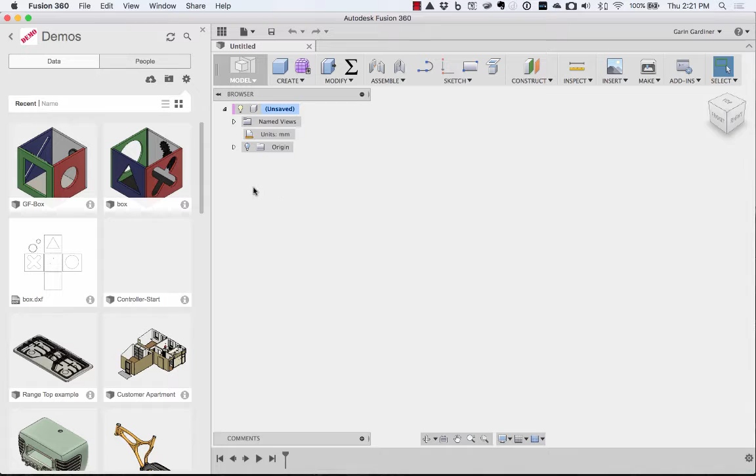So I'm going to show you how to create a new project, and also if any of you guys want to join this project, I'm going to call it a Glowforge project - a place where we can build things and share things out through the community. So I'm just going to call it Glowforge.

Create that, and then if anybody wants in, I can put a link up there. You can ask to join, and I'll just accept anybody that wants to join and see projects there. Part of this may be that I may want to add something like an icon and a few things, which I'll show you how we can do later. But I'm going to pin that to the top. So you can create a new project pretty easily.

I'm going to come into that project, and you can see that there's nothing in there yet. I could add people in here, which at some point you'll see people in there, but I'm going to close this for right now, and I'm going to create a new design.

Similar to what we saw in our GoToMeeting today, I'm going to start out with a sketch in the top view, and I'm going to turn on my origin so I can see that 0, 0, 0, which will be helpful as we move on in this design.

I'm also going to change from a 2-point rectangle to a center point. In my little sketch palette, you can change that on the fly, and we'll drag out the size of my rectangle.

I'm also going to come in and draw a couple of horizontal lines here and here. I'm not really too worried about where I place them, and then a couple of vertical lines there and there. I am trying to get them straight.

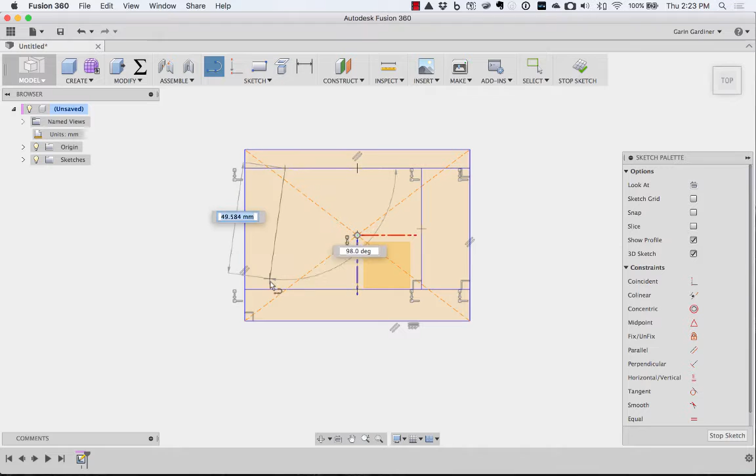You'll notice that it snaps them into place, but let's say by chance I accidentally put one in there that's not straight. You can either delete it and recreate it - that's a fast way to do it. You can also come over to your sketch palette and pick vertical horizontal and pick it, and it'll snap to vertical. And all of this, as I drag these things around, you can see how it all updates.

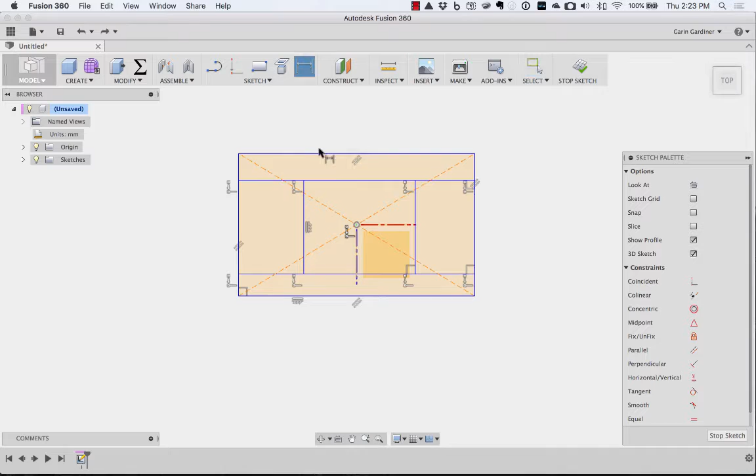But I'm going to come in with some dimensions and say, let's do the dimension of the total width of this. We'll do something like 100, and we'll do something like on the side, we could do something like 75.

Now what if we wanted to do some kind of equation there? So maybe we want this to be half of the 100 at all times. If I edit this dimension, you'll notice when I hover over the value, it tells me D1 is 100 millimeters. Well, I can use that D1 here. If I just type in lowercase d1, you'll notice that it makes it 100 millimeters, and it's always going to follow whatever I do to that D1 dimension.

If I go up to 75, they both go to 75. I can also do things like D1 divided by 2, so it's always going to be half of the 75. I could say D1 divided by 2 plus 25. So you have a lot of capabilities that you can come in and do. But in this case, I'm just going to say D1, so it's equal.

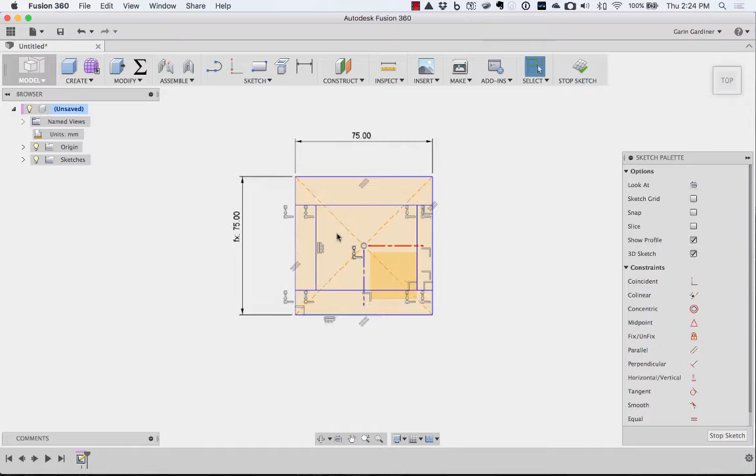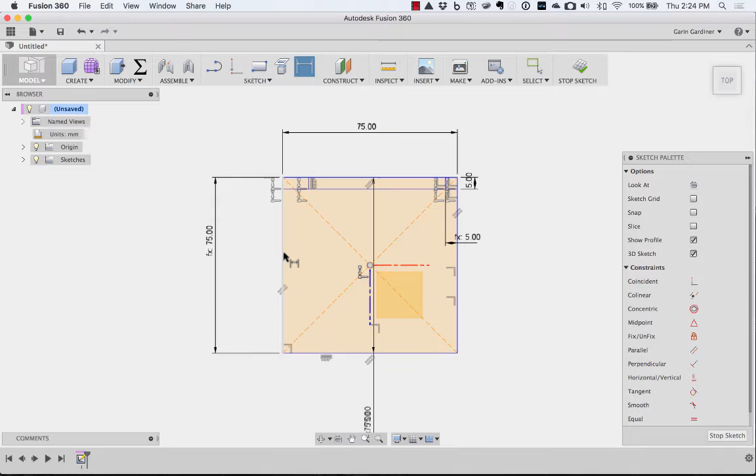We're also going to come in and add some dimensions here. We'll say that that's something like 5 millimeters. And similar to what we did today in our little webinar, if I double click here, same thing, D3. Now I can say the dimension here and here is going to be D3, and the dimension here and here is D3. I can also see when I do that, there's a little FX, although I don't think I hit the right thing there. D3 - there we go.

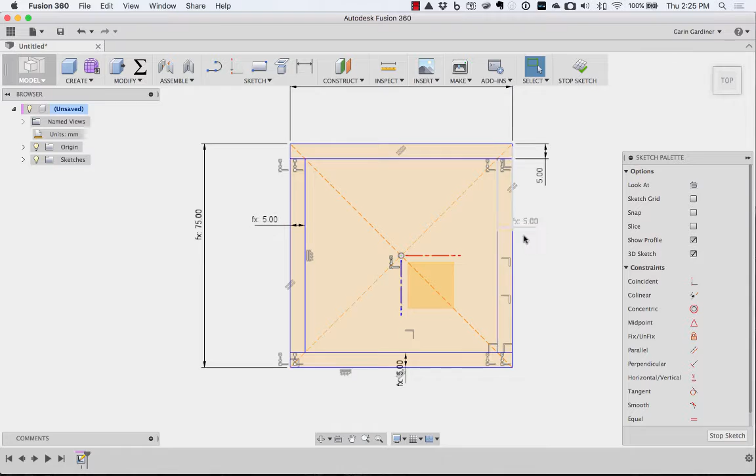There's a little FX next to the icons that are driven dimensions. Those are dimensions that are using some other dimension. So here I can see this doesn't have an FX, it's just the value, and then I can see these have an FX. So I know if I change that to be 10, all those others are going to change. If I go to 8 or 5 again, they all update. So that's in the sketching - that's a really easy way to lay that out.

And from here, I'm just going to save this, and for the first time we created, the name of this, we'll do 'box'.

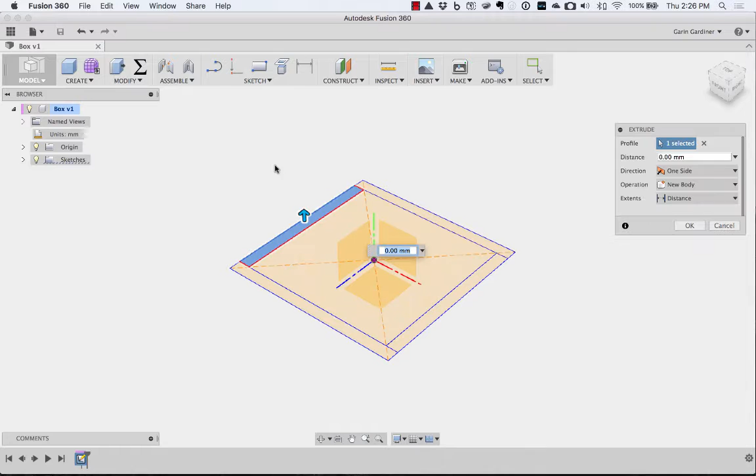And we'll save it. From here, we're going to extrude one of these up. You can either come down to under Create, you can come to Extrude. Press pull is kind of a universal command that does a lot of different things, so oftentimes you may want to start there. If I use press pull and pick the area I want to extrude, you'll notice it goes to an extrude command. If I pick an edge, it's actually going to fillet that edge.

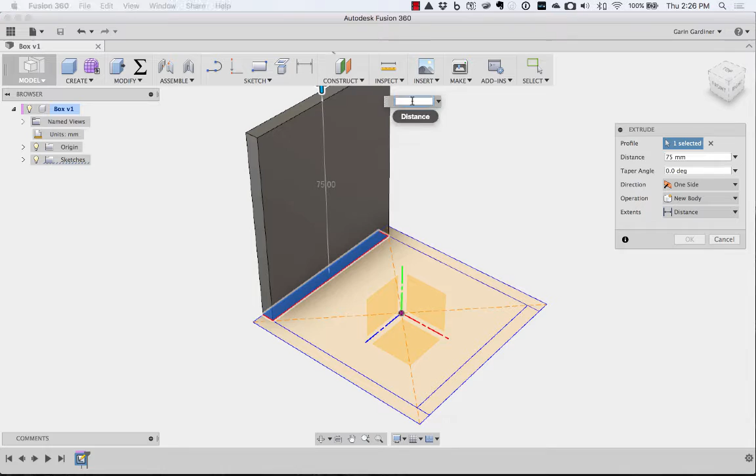So it does many different things instead of having to pick a number of different commands. But let's extrude that up at something like 75 millimeters. That might be a little tall. Maybe we'll go 50. Something like that. Let's see. There we go. We'll say 50.

The sketch gets turned off, so I'm going to expand the sketches and turn that one off. And I may even rename this and say something like base sketch. You can name pretty much anything in there. You can see my timeline as I'm creating this.

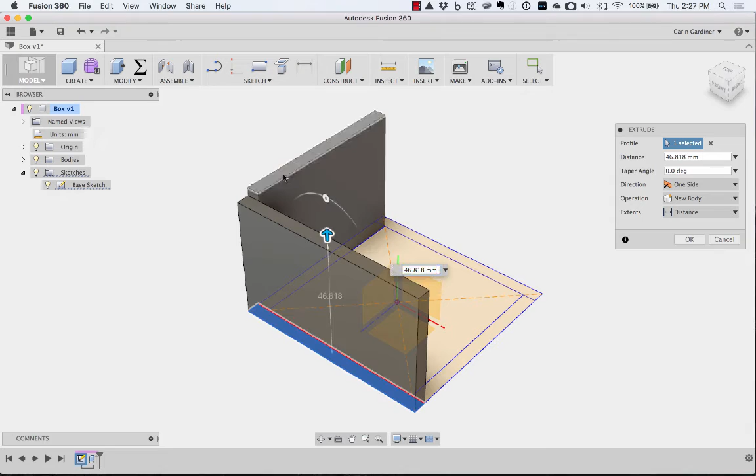When I go to extrude the second one, I could just pick the top face and it's joining these together as one component or one body. In this case, I probably want multiple bodies, but I also don't know exactly how. I want to set this up where if I change one value, all sides update.

So before I extrude that up, I'm going to go to my parameters, and you can get that from here. Change parameters, and underneath that extrude, we can see here that D7 is 50 millimeters. Well, I could keep it D7, but I want it to be something more recognizable, like height. And I might even make that a favorite where it shows up at the top all the time.

And I could probably do that with that first sketch with this 5 millimeter value that is the thickness of my material. Maybe I'll do thickness. So those are two parameters I'm probably going to use a fair amount: the overall height of this box and the thickness of material that I use.

So now I can come back and say, let's grab that, drag it up, and here I'll say height and make sure that I make a new body out of it. So now those two share that height parameter.

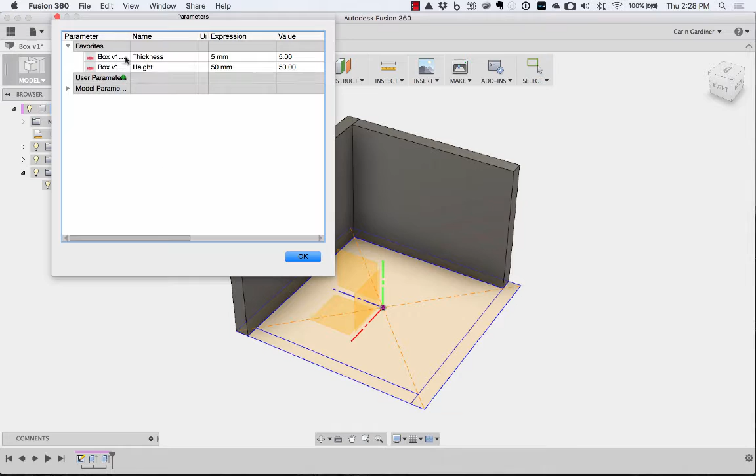So if I come in and say let's make the height 75, they both update. If I say let's change the thickness of this to be 10 millimeters, it updates. We'll say 5. Let's go back in there, say 5 there, and maybe we'll do 65 here. So it looks pretty good.

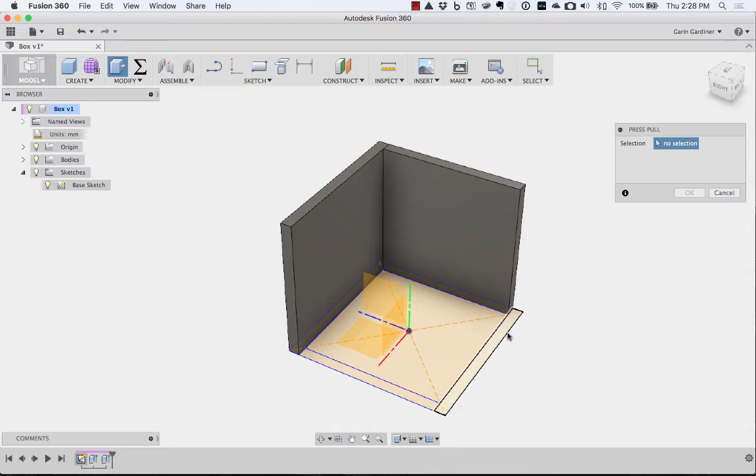We'll finalize this by grabbing that, dragging it up as a body, and the distance is going to be height. And I'm going to right click, repeat press pull, drag up, new body with the height. And I'll right click, repeat press pull on that, pull that up, new body, and then this one is the thickness, which I don't have in here yet, so we'll just say thick.

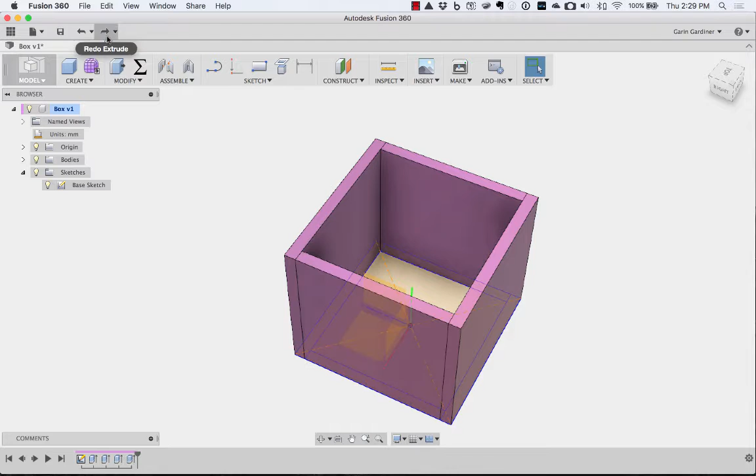Whoop, did not mean to do that. Let's change that back to, there we go. Alright, let's pull that up and we'll say thickness with a new body. So I have 5 new bodies.

If I look over in the bodies directory, I have the 5 of them, and I can even come in and say that is the left. Now we'll say that's the front, back. You don't have to do this, but it makes it kind of nice when you're working on it to be able to make edits and see all of those.

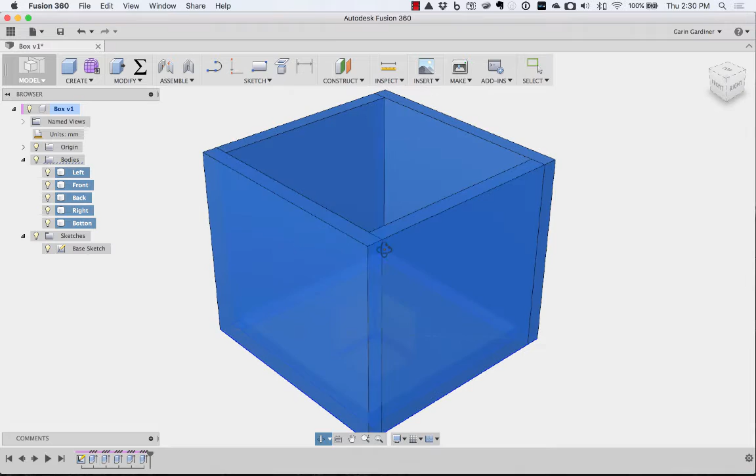And I may also want to convert these at some point to components. So those are all bodies, and usually when I'm laying something out I may use bodies, and then at some point I may say let's make components out of all of those. I probably should have waited to name those after I made components, because it doesn't maintain that. But here these are their own individual components that I can kind of dissect, pull apart, and snap back together. But components react a little different than bodies, and that's probably a bit separate conversation, kind of exactly components and bodies.

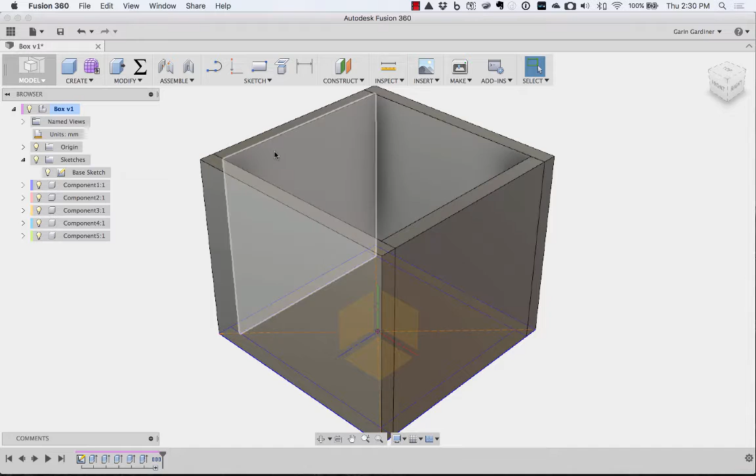But you can create something that's a body, and it's kind of flexible for conceptual design and laying things out. Then you can make components and figure out that these two components go in as a subassembly, and I can turn those off together. These two go together, and I can group and turn those on and off. So there are things you can do like that.

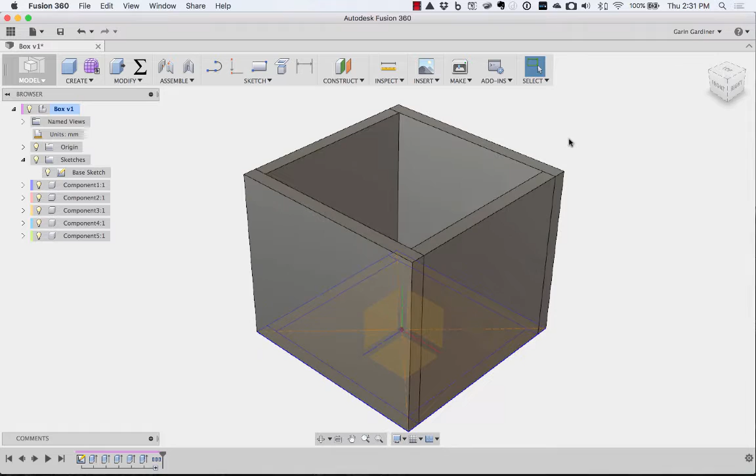But at any rate, let's bring those back together. We may also want to come in and apply some material. So the physical material of this, we may say that the physical material is something like walnut. I'll drag it to the top level and apply it everywhere. Then it may be that I want a different visual appearance.

It may be that you want to paint them white, but you want a physical property of oak. If I right click and go to properties, it tells me the physical material is walnut, and it has the area mass density of that component with that material. So if I change it to aluminum, it's going to have different properties.

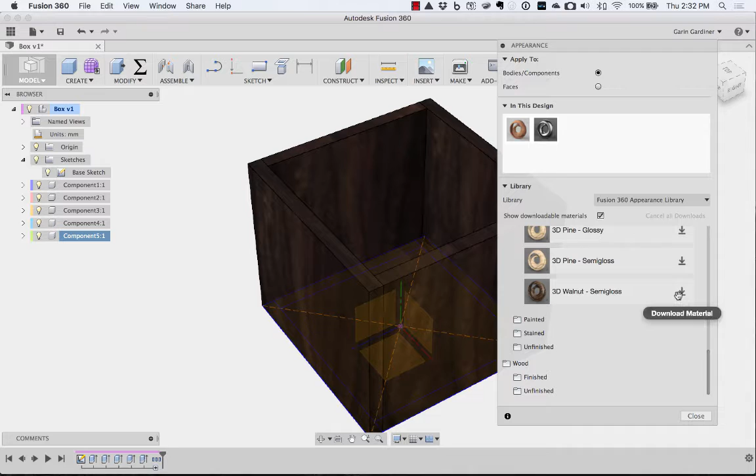That's a good way, if you're worried about weight or other information, to get it there. I'm going to go to appearance though, and we have some new solid wood options that I think look a little nicer. So I can download the semi-gloss walnut and drag it onto a face, and we can see that. Let's just apply it on all faces. You can see the end material and the side material.

This is kind of cool. If you go to one of those, like the base, let's say you don't want it to show the end grain and want it to look a little different, you can come in and adjust that.

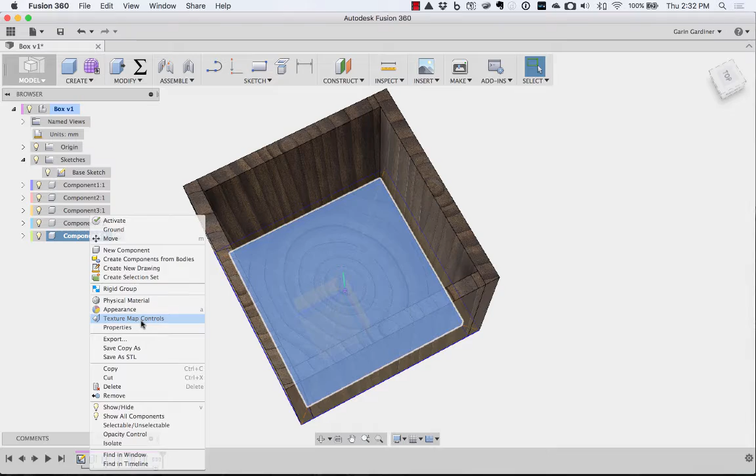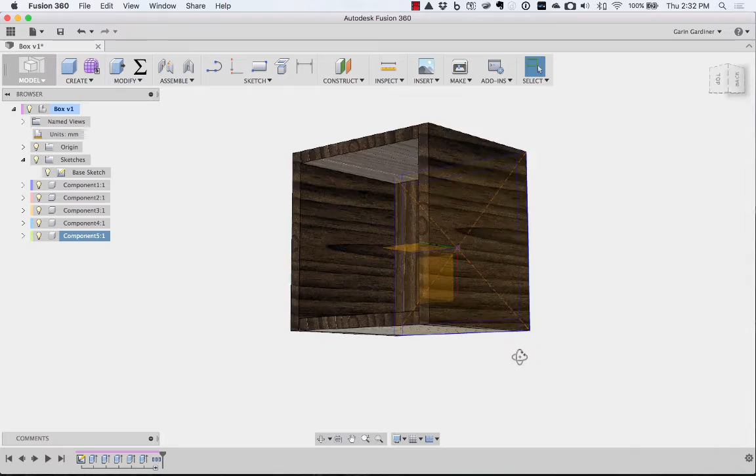Let's go to texture map control, and let's see if I can get a good angle here so you can see this. I can actually rotate that wood grain so it goes the long direction instead of the top direction. It's kind of cool that you can really adjust that how you want. If you're looking at rendering this to make it look nice, you have a lot of control.

Okay, so once we have that, I'm going to save this. We'll say that we have the walls, and from here we have that. It's easy for us to come in and say let's change that to be 5 millimeters. Everything gets thicker. Let's say it's 50 millimeters tall.

So you can see how flexible it is once you've created the layout that you want, how easy it is to come in and modify those things. So if you spend a little bit of time up front, it makes it a lot easier downstream making modifications if it's something you're going to use a bit.

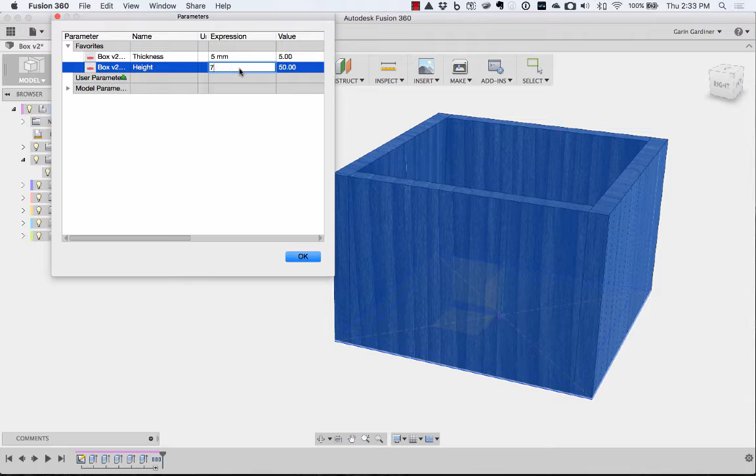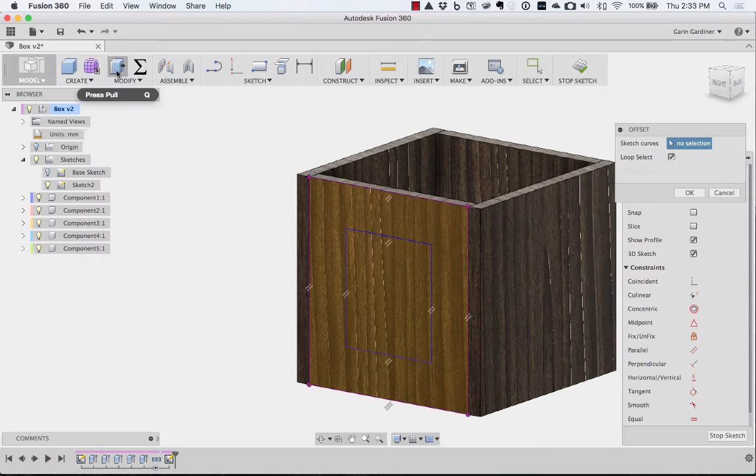Let's go to 70. Okay, so now with that in place, I'm going to turn that base sketch off and the origin, and I'm going to cut a couple of things on each of the faces. So we'll go to the right face, and let's say we just want to offset the edges and cut a rectangle through there that's offset. Let's just cut that through. You can see that we now have a hole that goes through there.

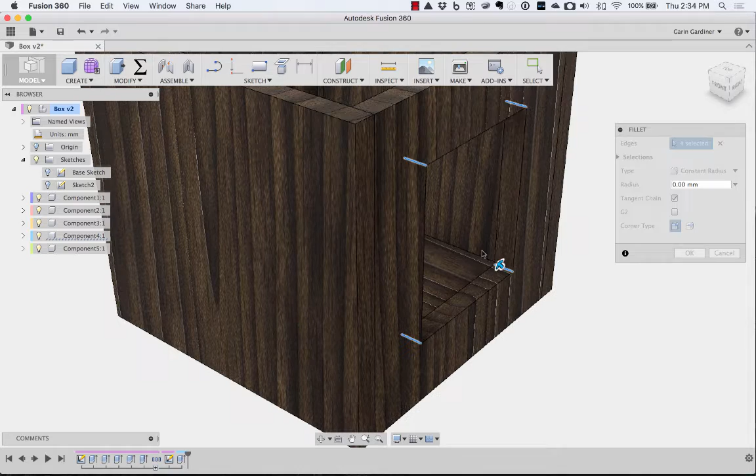If I wanted to put a nice little fillet on the edges, I could use press pull, grab the edges there. You may wonder how I'm orbiting around. If I hold the shift key and the middle mouse key down, and pan around, you'll notice that it allows you to orbit in 3D space pretty nicely.

If you don't hold the shift key, just hold your middle mouse, you can pan. If you roll your middle mouse wheel, you can zoom in and out, so it makes it pretty easy. But you can see here that we can fillet that edge a bit. Probably not something you'd use on the laser cutter, but if I wanted to put a chamfer around that edge, you could chamfer it as well, and you can see that material is just awesome. You can chamfer that and get a nice chamfer on the edge.

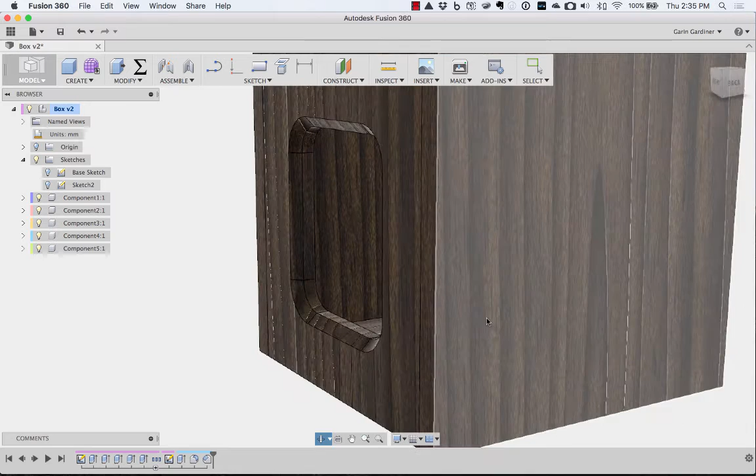I'm going to delete that chamfer, so I can just right click on it in the timeline and delete it. Let's go to the front view of this.

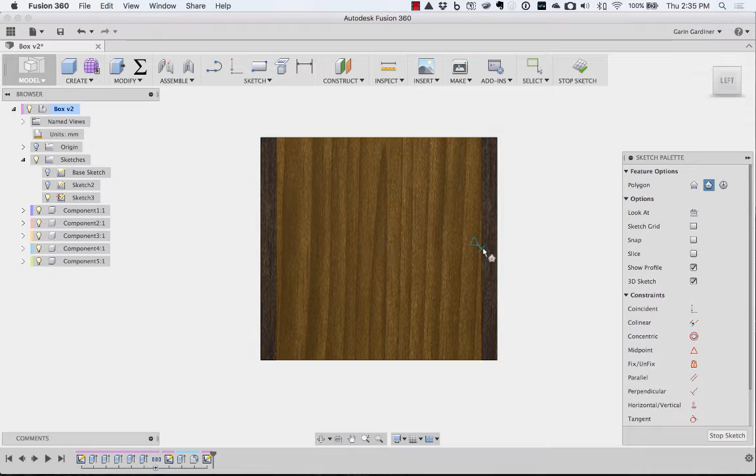Actually, not the front, let's go to the left view, and we're going to place a sketch here. This time we may want to use a polygon, and we'll find the midpoint there and come over, doing 3 sides.

Let's go here to number of sides, we'll do 3, so it's a triangle. Drag it down a little bit. So now I have a triangle there. I want this bottom edge to be horizontal, parallel with the ground.

So I'm just going to say that we're going to make it horizontal. Now I can drag that around a little bit. If I wanted to change the size of this, I can put a dimension from this base edge to the top and

say maybe we want it to be 50 millimeters. It's going to grow for me. It may also be that I want to find the center of this box.

So we'll come down here, and we may have - that may be the center - but we'll draw a line there, and then, no, I think that's the center.

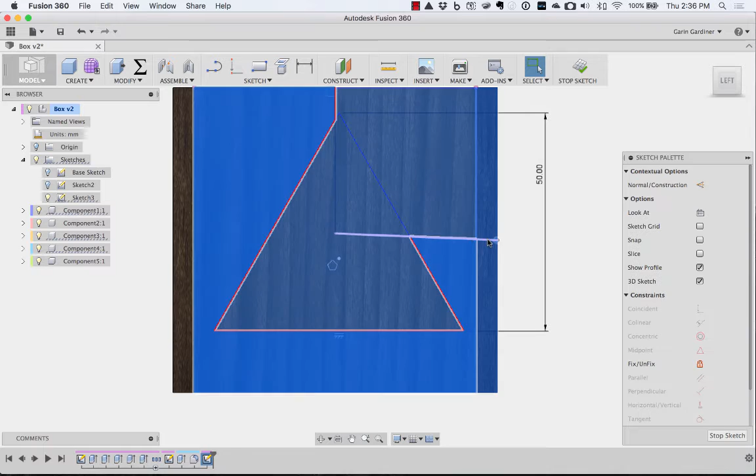Let's do that one more time. We'll find - oh, I think it is in the midpoint there. So let's drag that over.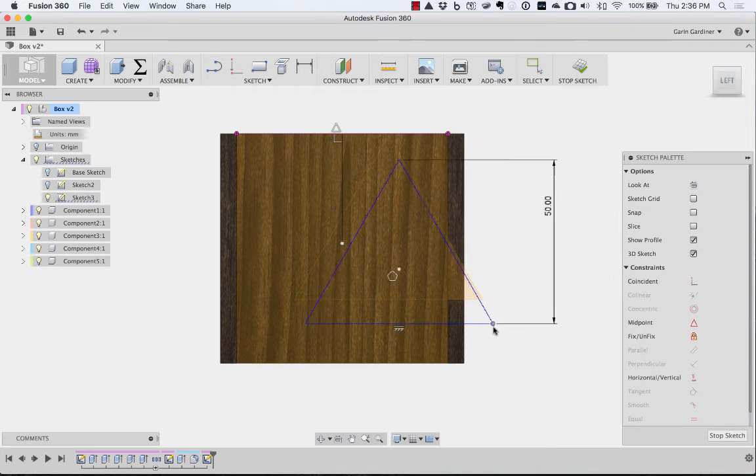Let me undo that so we can see. When I place this, let's grab one of the edges. You can see that I can move it around. Well, let's pull it down here just for a minute.

And when I draw these lines - we'll make this a construction line in a second - but I can find the midpoint of this line here, kind of track over. So that is the dead center of this box, and there are a couple ways of getting that, but that's the dead center.

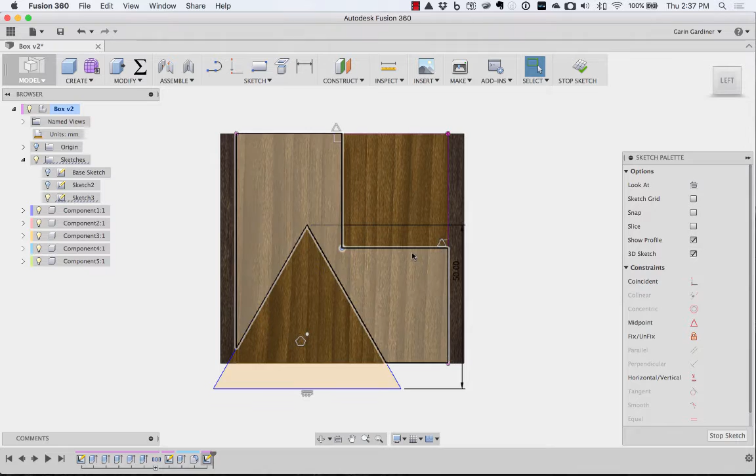I'm just going to turn those into construction lines so they don't show up if I try to extrude this. And then from here I can also grab that point and that point, snap them together, and we can see where that is.

Now it may not be, looking at this, quite where I want it to be. So instead we may say let's put this on the edge and not the point, so now I can move this up or down kind of where I want.

So it's centered side to side, but up and down I can kind of eyeball it or put a dimension off of the bottom down here to place it where I want. Maybe we do 10 millimeters.

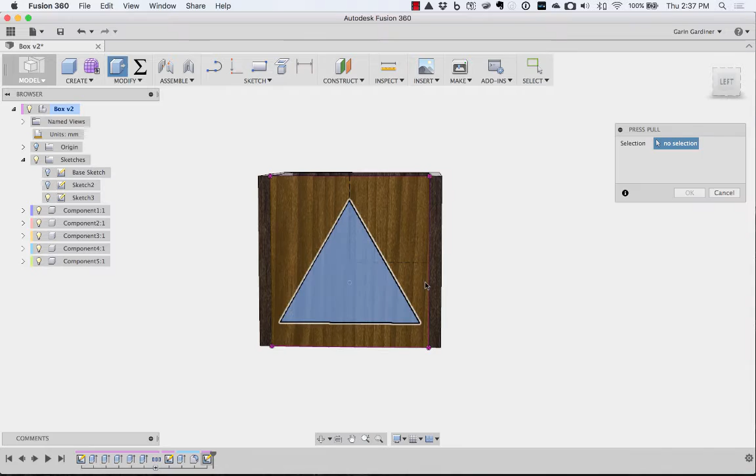So once I have that, then we can come in and say let's just extrude that through my part. Let's make sure I grab the right thing. There we go, pull that through. So now we've cut that.

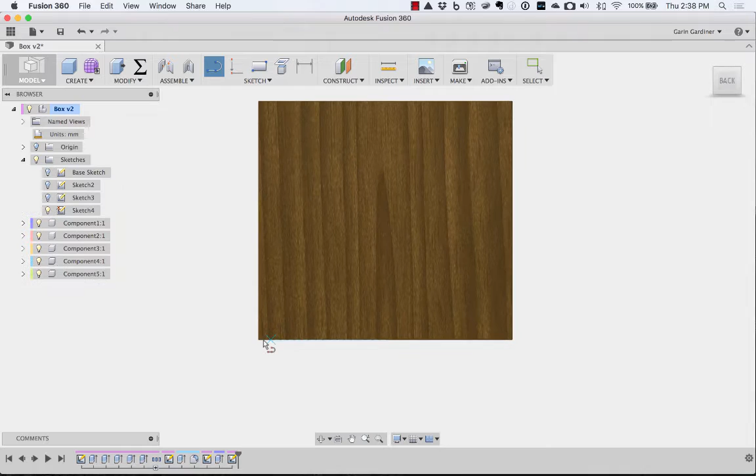And then the final one, let's go to the back. I'm going to create a sketch that's going to go from one corner to the other corner, and for fun we're just going to use a slot.

We'll just do something like from there to there, and we may want to place a specific dimension here so we know it's the same on both sides. So I'm going to pick center and center, and you'll notice when I do that - let's just pick center, center - and it's allowing me to place a dimension here.

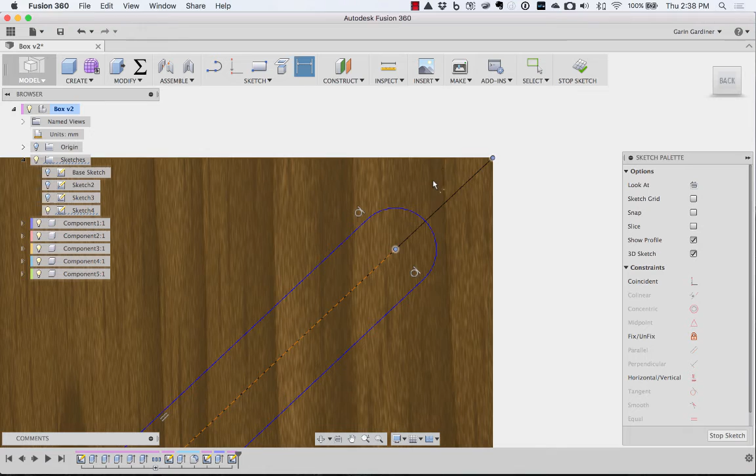So when I'm placing this, if I come close to that edge and pick, it's allowing me to pull in an aligned dimension. I can also right click and say align vertical or horizontal. So if I do horizontal, you can see that it's locking horizontal, vertical, or aligned to the 2 points that I've picked, which is kind of handy.

And we'll do something like 15 millimeters there, and we'll do the same thing here. We'll say aligned, going from point to point.

Looks like I'm not, there we go. Make sure everything's deselected and make sure I'm just getting those points. Right click, aligned, and we'll say 15.

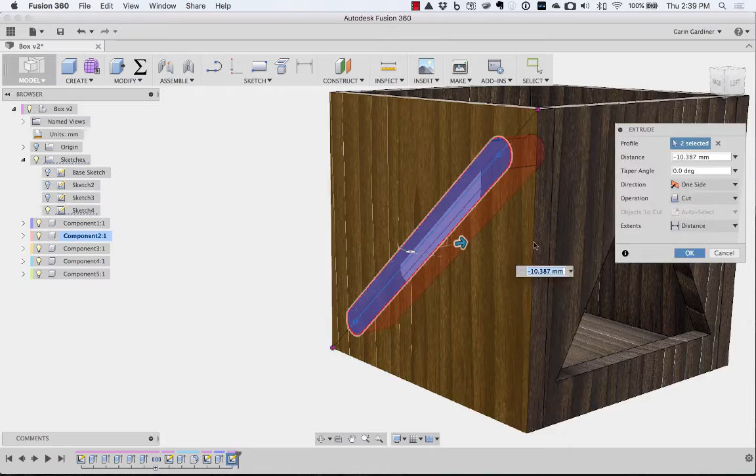Alright, so with that we can grab each of those sides, cut them in. So I have a slot. What if I want that to be an X?

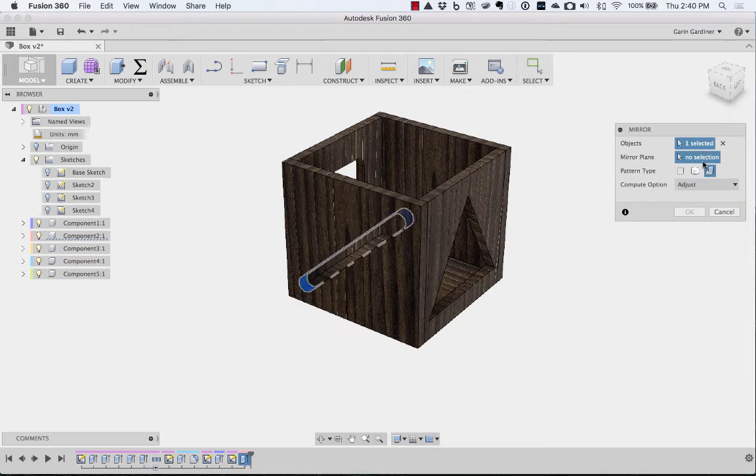I could come in with my mirror command and say we want to use, I can pattern faces, bodies, or features, and I'm going to do a feature, and we're going to grab that feature from the browser. And then for the selection, I'm going to use the mid plane here, the origin. I can grab that plane, since if you created the sketch right in the dead center, it's easy to grab that plane. So that works.

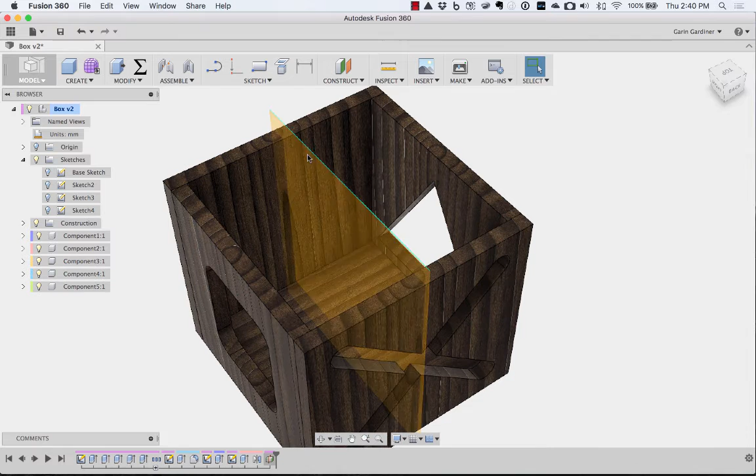Now in case you didn't do that, one thing you could do is grab this mid-plane option, so under construction mid-plane, and you could pick plane or face 1, face 2, and it gives you a plane right in the center of those two, and regardless how big of offset you get, that plane will always be in the middle.

But if we've constructed this correctly, I should be able to come in now and try things out and say, well, let's make this 8 millimeters wide, and we'll say 100 millimeters tall. And we can see it compute all of that. So all the parameters and everything I've put in there.

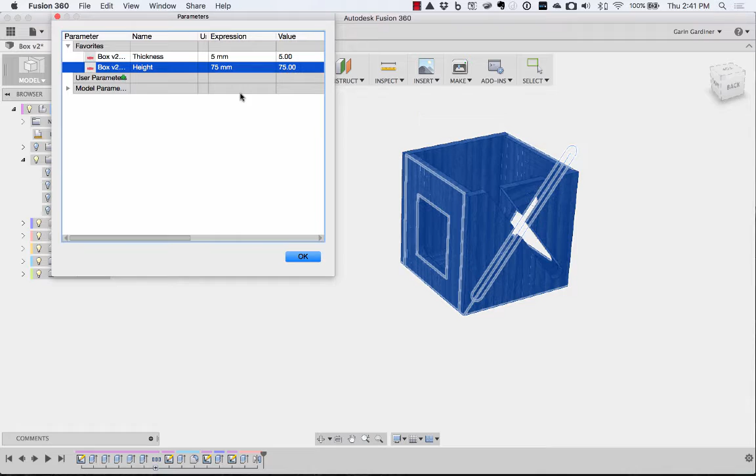Now there may be some things that I'd want to adjust. I don't have all of these things parametrically tied in so that everything updates 100%. So it just depends on what you're trying to do. You may want to come in and add a little bit more intelligence so that it's exactly where you want, or centered, or any of that good stuff.

So with that, let's take a look at that sketch there. It looks like that didn't stay horizontal. That's kind of interesting.

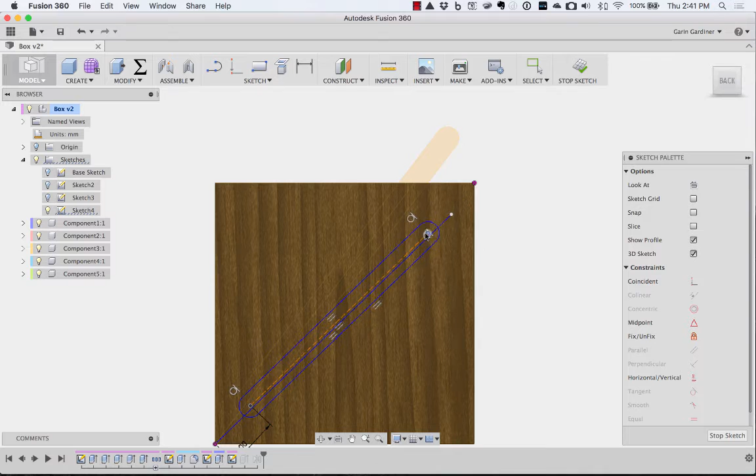So let's do this. And when you run into things like this, it's easy to fix. In this case, we'll delete that, and I'm just going to pull that down and redrag that over. So there are some things you can do if you run into these things that aren't updating like you would expect.

And sometimes if it's acting funny, you can, like in that case, we'll get rid of that line, and I'll just draw another line in there. So we'll go point to point and drag that there.

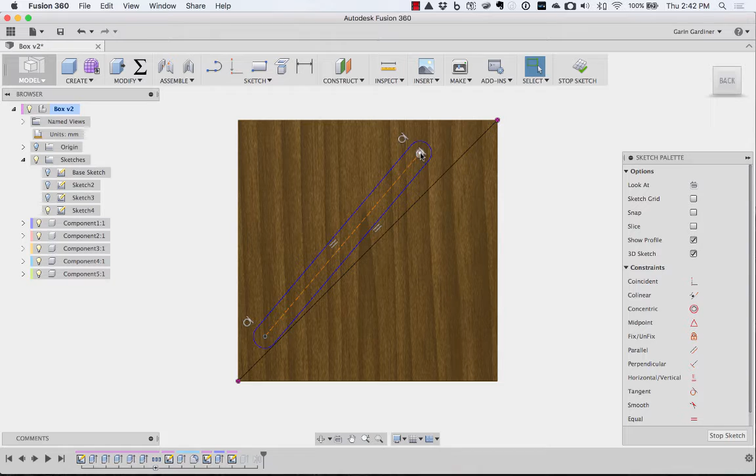And you can see here too, it looks like I don't have a tangency. I don't think I put a last tangency on that last edge. So we'll say pick both of those edges. It gives me a nice tangency on that sketch, and you kind of get how you can do that. And I could place all the dimensions in there, but in this case I think we're in good shape.

So the final thing I'm going to do is let's add a couple of gears on here, and maybe let's save this, and then I might add some different materials on here real quick.

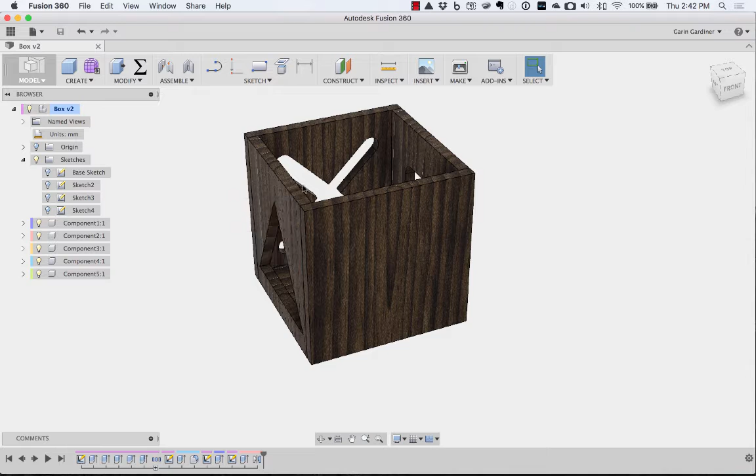So let's just go to the appearance, and we may want this to be more of like a kid's toy. So I'm going to go to plastic and say, red, green, yellow, and maybe we'll make the bottom just a black, or maybe we'll even do transparent on the bottom.

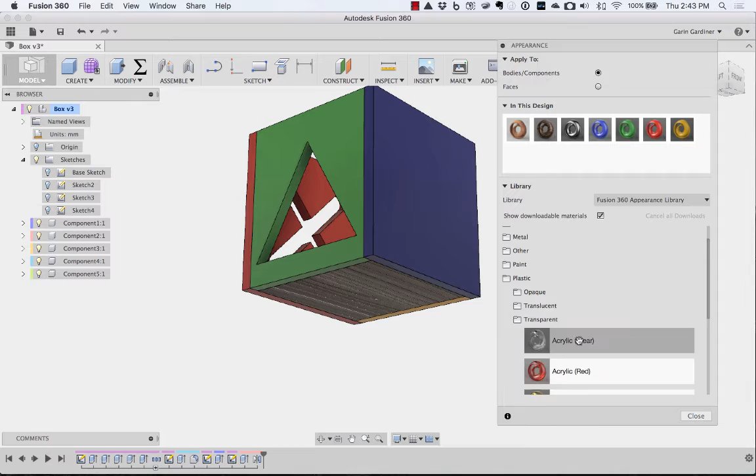We'll say plastic transparent and place that on there. So we get something like that, and let's save that.

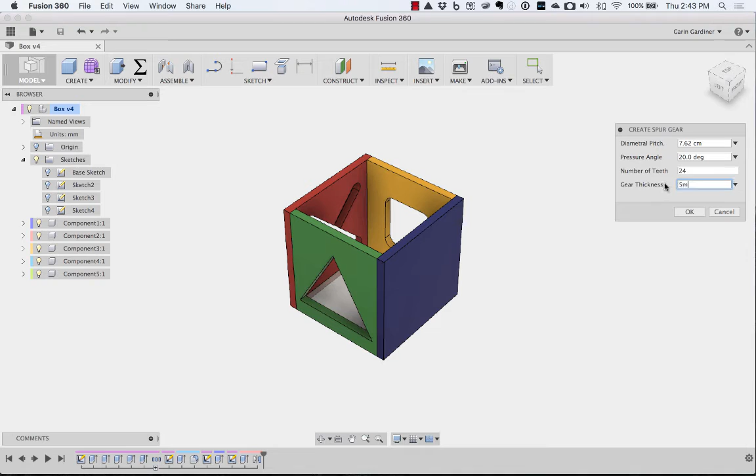Now here I'm going to go to one of my add-ins that I really like. It's just a little gear generator, and I'm going to tell it that we want 24 teeth at 5mm thickness. Hit OK. So that created one gear for me.

We can see what that looks like. And then let's create another spur gear. Let's go to script, spur gear, and this one we're going to do 8 at 5mm.

So we have two gears, and I'm just going to look from the side here. Let's just grab both of those and pull. There we go. Make sure we don't get the yellow part. I'm going to pull them over kind of where I think would be a good spot. Make sure we get them both.

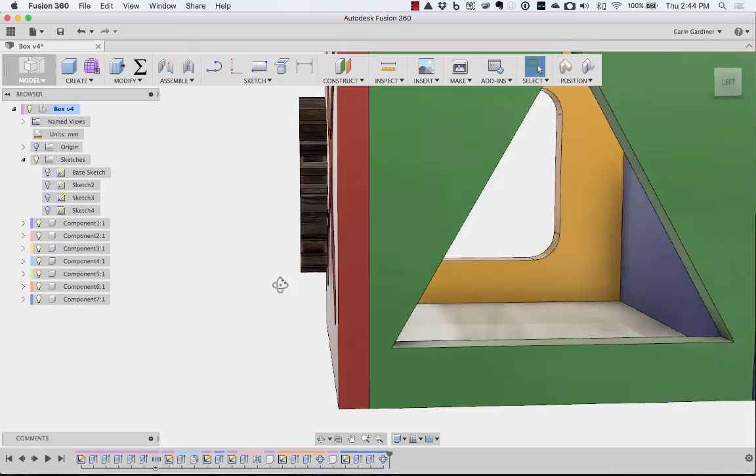Kind of a good spot, and then we'll go to, although I want those to be on the back face, so let's pull those over to the other face. And I'm eyeballing this right now.

Let's just say that it's a little toy. I'm not too worried about the exact location of the gears, but I do want them to mesh. So we'll do something like that.

That should work okay. If I'm doing these with metal or something that's more of a precise thing, then I adjust them a bit more appropriately, get the engineer's handbook and figure out what the center distances needed to be with the gears that I've specified, or hand calc it.

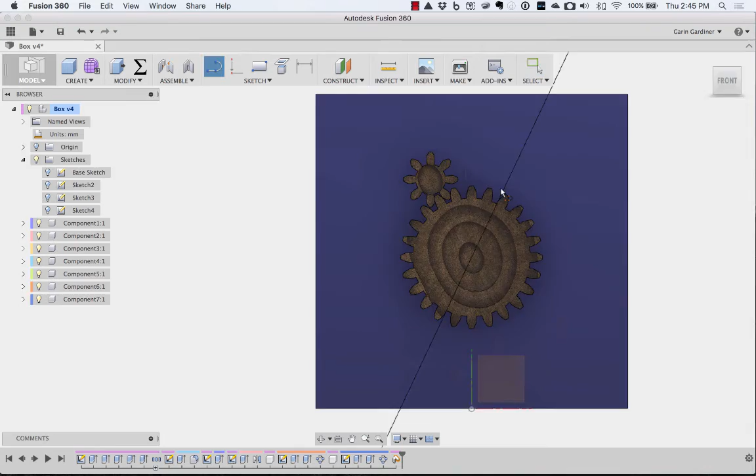In this case, we're just going to drag them. Let's take a snapshot to keep the location of them, and then I'll create a sketch there. I'm going to use the project command and project that face and that face, and then turn off those gears. So now I have the location of them, and I can use that for my hole.

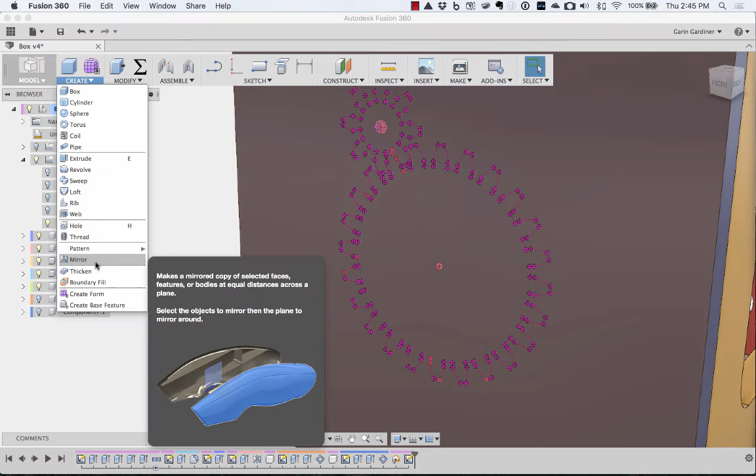I've kind of eyeballed where I want it. Now I'm just going to zoom in there to make sure I get the right point. Let's grab that point right there and go depth. We can use thickness here. We want to go through the entire part, and 3mm is okay for the diameter.

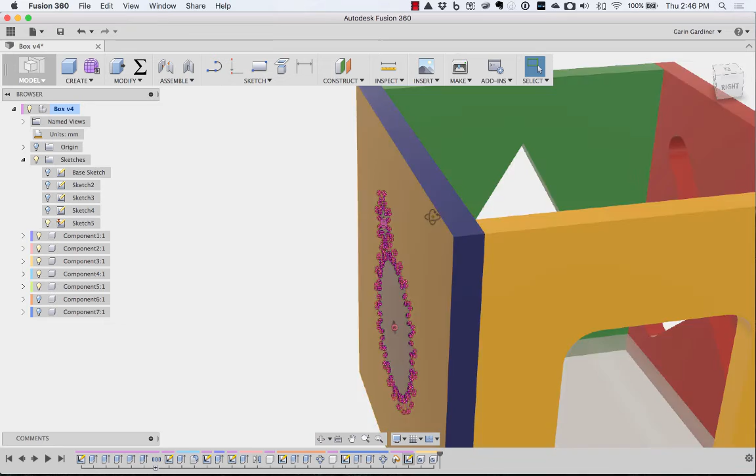Let's turn that sketch back on and zoom in here. We're going to repeat that hole and place it there. 3 millimeters, we'll say thickness. That way, if the thickness of my plate material changes, that hole will always go through it as well. Okay, so we have those, and now I can grab my joint command.

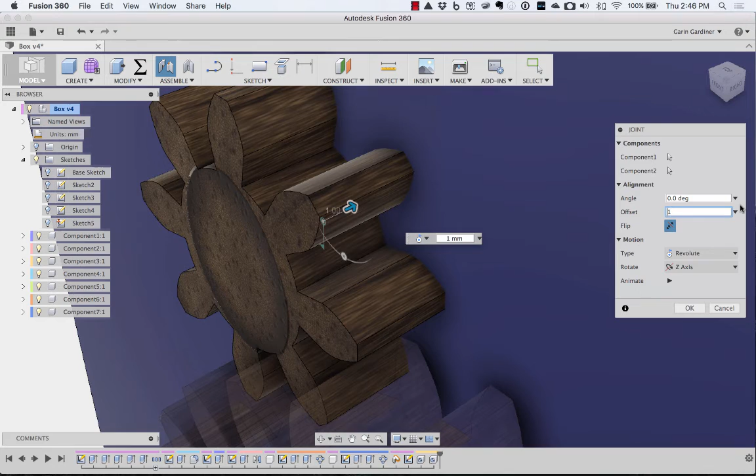I'm going to grab the outer cylinder and the inner cylinder there, the diameter of the hole, and one of the faces of that gear. And we may even want to offset it a millimeter, so we'll do a -1 so it offsets it out from the face.

Hit OK. Now, real quick, you'll notice as I try to drag that, it's grabbing and dragging the whole thing. So what I'm going to do is ground the floor, the bottom piece—right click and hit ground. So now it can't move around.

And I'm going to use an as-built joint. What the as-built joint does is it's constructed in the right location—I just want to weld it to the other components. So I say the back and the bottom, weld them together with a rigid joint. The side, bottom, make them rigid. The other component, make those rigid too.

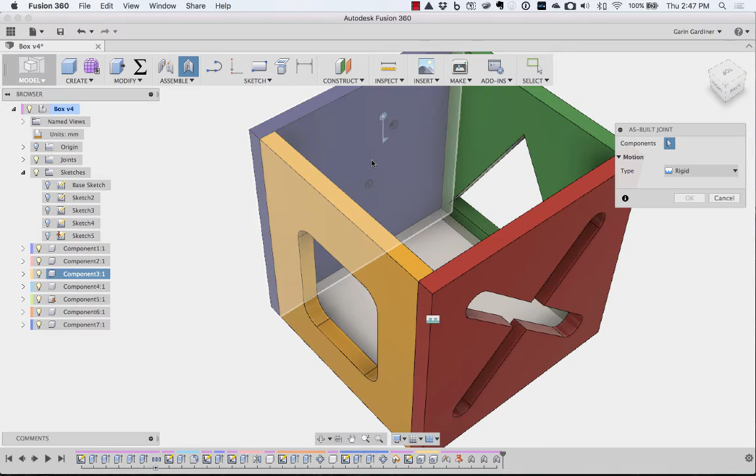So now they're all tied together. In fact, if I suppressed that ground and moved it, you'd see that they all move together. So let's unsuppress that ground so it's locked down.

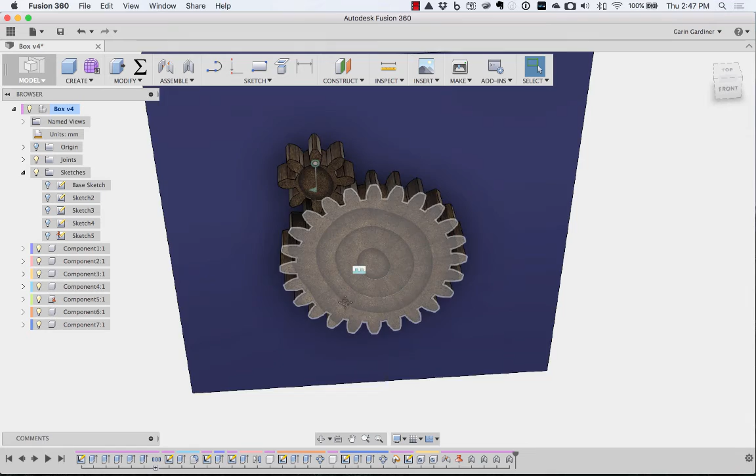So now when I drag this, we can see that gear looks pretty cool with that walnut wood grain. I can drag it and see what that looks like. I'm going to revert its original position, and then we'll come in with a regular joint again, and grab that face right there and the hole.

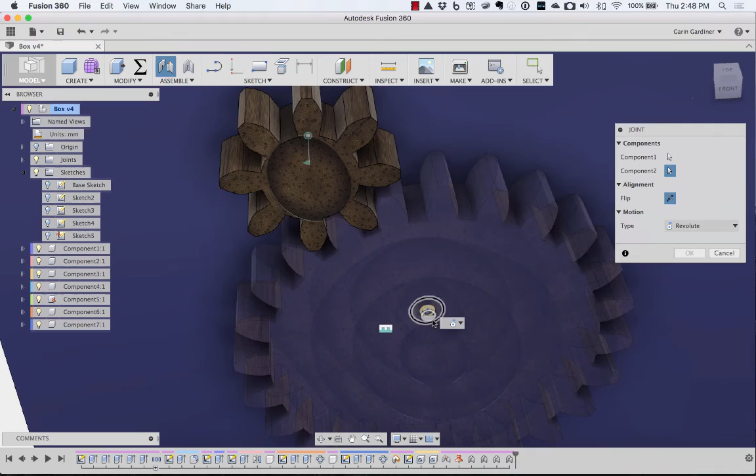So now I can drag that, and I could come in and turn on contact, but contact is a little tricky with all the different faces it's touching here. As it's rotating around, that's not a simple solve.

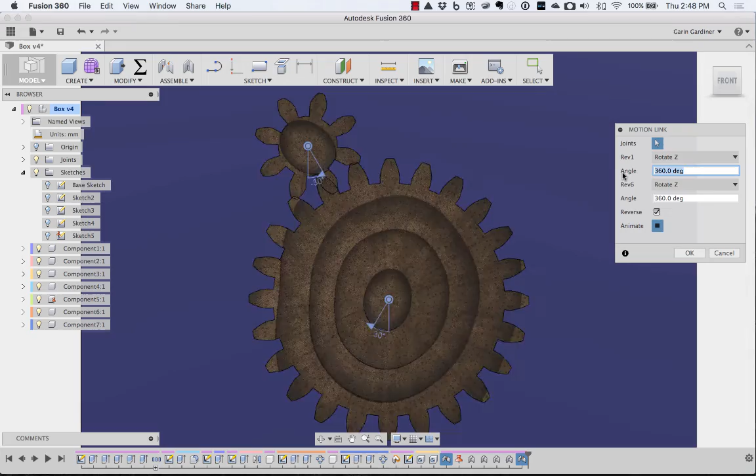So a good thing we can do is a motion link—this is a bit more of an advanced feature. I can say I want these things to rotate together, and we want to reverse the order. Then I take this first one, which was 8 teeth, and the second one was 24. Looks like I need to do the other direction—24 teeth by 8, so that's just the gear ratio, and there we go.

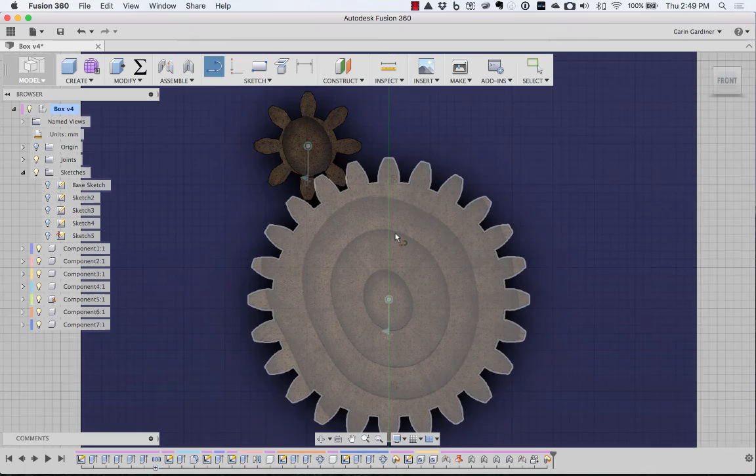So now as I drag that, I can see that work, and just for fun, I can get a little more advanced where we'll capture that position. We'll say on that gear, maybe we're going to come in with a spline, and we'll just do something like that, some funky little shape here.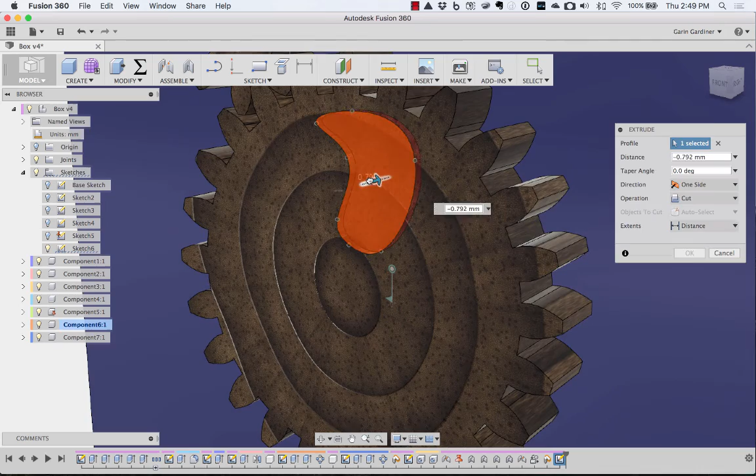Let's pull that in a little bit and adjust that. So then let's extrude that in a bit. We'll give it a thickness, and just for fun I could say let's do a press pull, and we could put a fillet—we'll do like a 1 millimeter fillet on that, and I'm not sure how deep it is, let's do 0.5.

Thinking about how that's going to cut with our Glowforge or a laser, we probably don't necessarily want it on there. But I could put a fillet on there if I wanted.

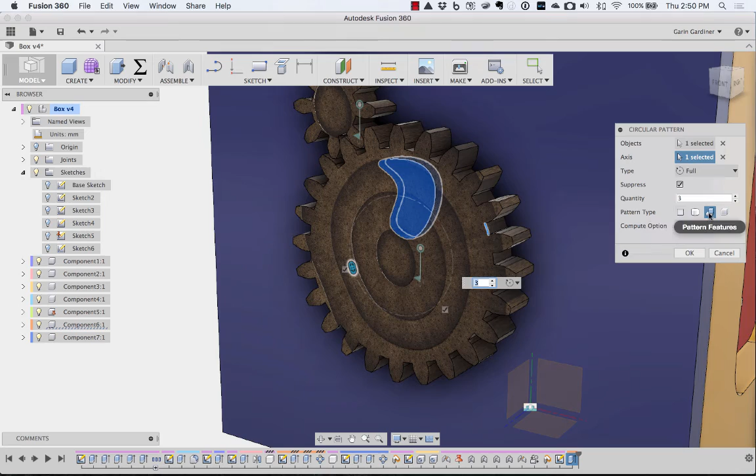Let's come in and say let's pattern that feature around the axis there, and let's make sure we have it as a feature. There we go, so I've cut that out a bit, and you can kind of see what that's going to look like. So we're in pretty good shape there.

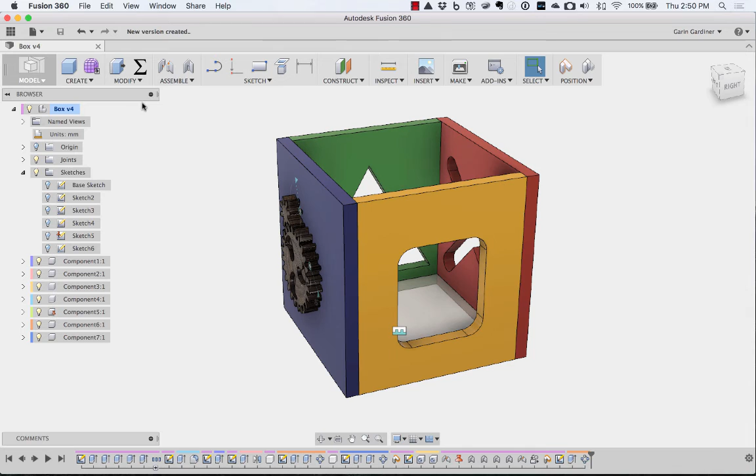I'm going to save that, we'll say final design. And for the fun of it, we also want to be able to cut this out, so I'm not going to worry too much about keeping everything in the right plane, but we want to create a DXF of this.

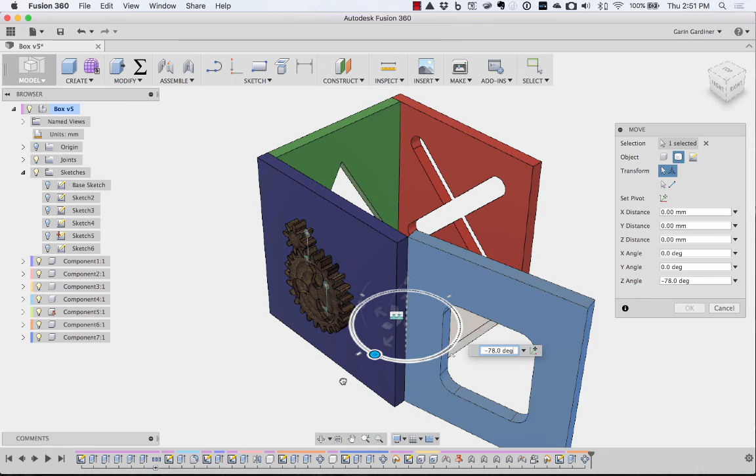So I'm going to go to my move command, and I'm going to say let's come right here. Wrong component, let's go there. I'm going to rotate that 90 degrees, and we'll say come out. And if I'm wanting to be very precise, I can use this point to point, and I can say move that to that, and then let's move that out a little bit. So that point to point is kind of cool.

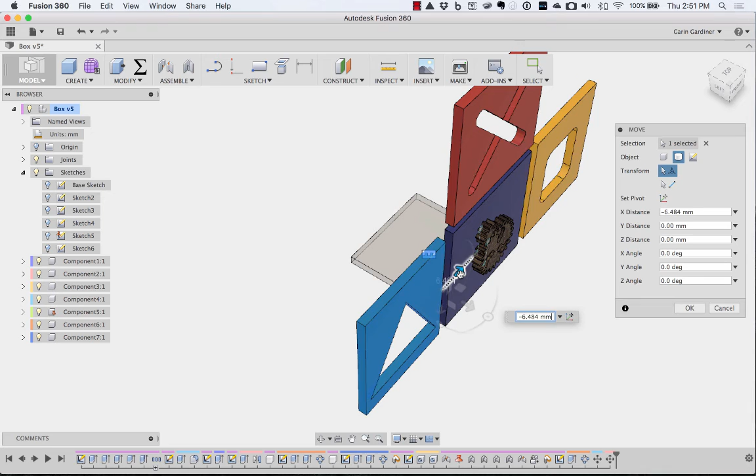I could do the same thing with this one. I could say grab that guy, and let's say point to point here, only we want to move that up a little bit. So I go back to triad, and let's come here, say let's move that guy out 90 degrees, let's go point to point, say let's move that to that, back to triad, scoot that over, and I can key in the value too if I want that to be super precise.

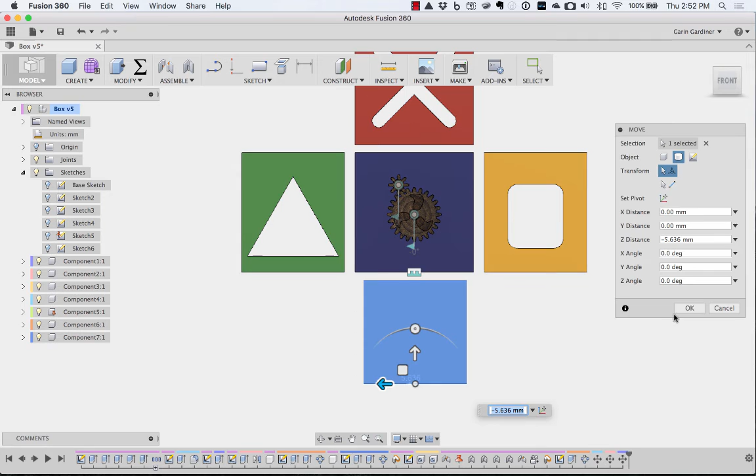And then let's grab that bottom face, let's rotate it, and we'll say point to point, and then we'll move it down. So in really not a lot of time, and I may even shift that over a little bit, we're able to lay those out.

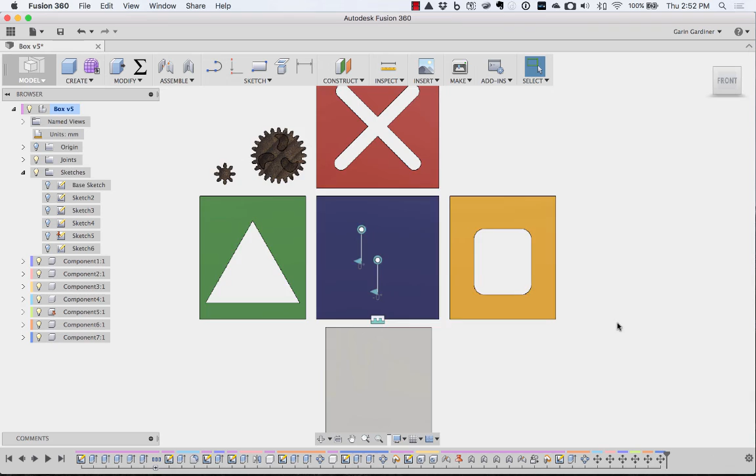Let's also come in and say let's grab one of those gears, in fact maybe we do both of them, but we'll say move that over there, move that right there, and from here I'm going to save this as a layout.

Now the nice thing is, when I want to see this all back together, I can grab my end of part, move it over to move it forward. I could even grab all of these and group them together so it's in one group, and I can roll forward and we're all together, roll back, it's all apart. So this is really part of the history that can be really handy.

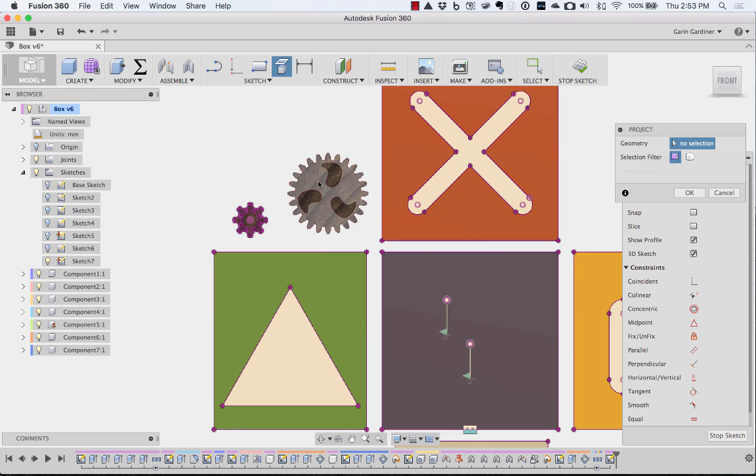But I'm going to create a sketch on this face, and with that I'm going to use the project command. I'm going to say project each of these faces, we'll grab each of those, stop that, and let's turn off each of these components. So now we can see in this one sketch we have all the geometry that we would need to cut this out.

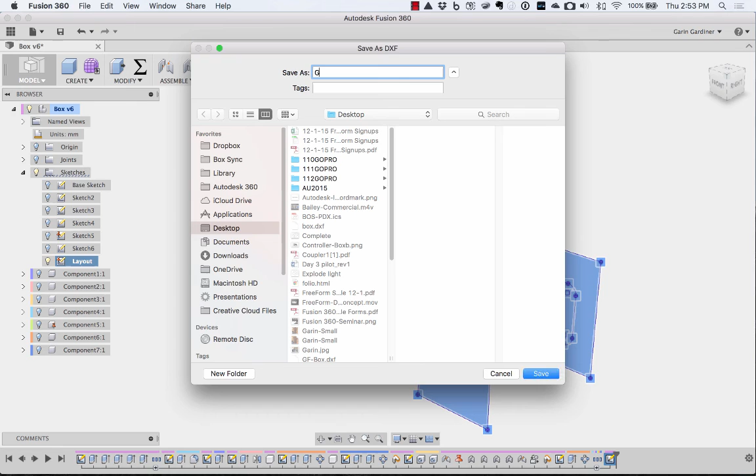From that I can go to that sketch, and I may even rename that sketch as layout. I can right click on it and tell it to save as DXF, and we'll do Glowforge box 001 on my desktop.

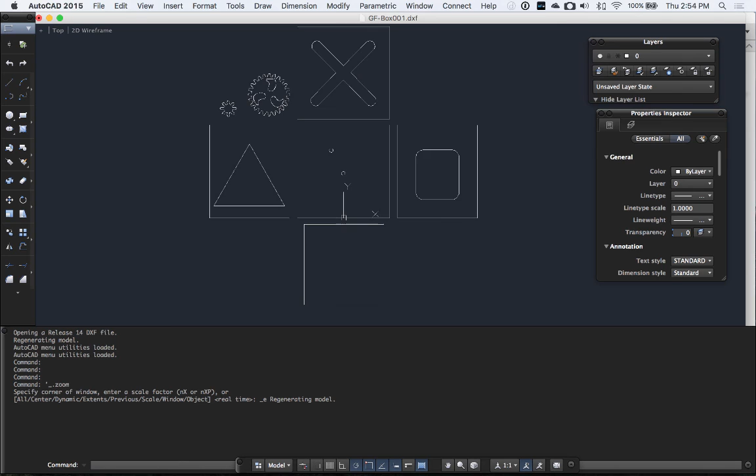So then I can go to my desktop and look at that. We'll open that up through AutoCAD, and this is the one that we just barely created. Do a zoom extents, and you can see what that looks like. So pretty easy for us to get that out.

I can go back and make changes to my model, you know that's the beauty about the parametrics. If I came in and said, well really I want that to be 70, or let's say 65 millimeters, updated it. So now all the sketches are already up to date, or that one sketch.

So I just need to re-export that out as a DXF, and that's the way I'd go. So notice if I go back to 75 and hit enter, 75, enter, you're going to notice that that shifts up.

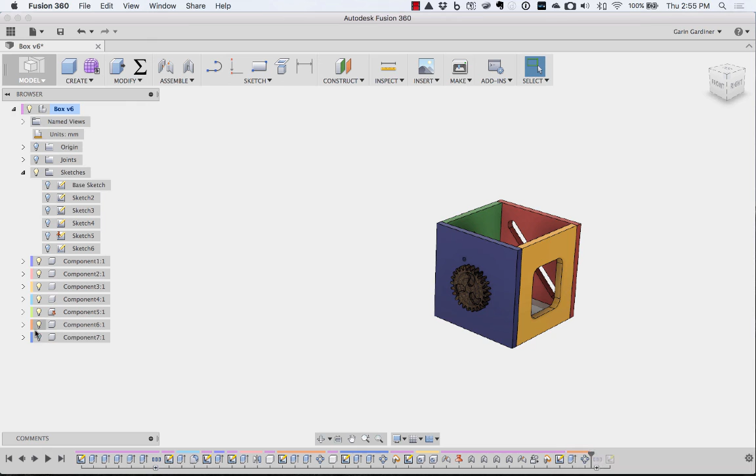So I'm going to turn that sketch off, roll back, and turn all these other components on so we can see it. And we're good to go. Let's just save this as our final design.

We're good to go. So hopefully that helps kind of learn a number of things with Fusion 360, how to get in and get working. If you're interested, you can join the project here, you can see the design file and play around with it, see if you have any questions. So hopefully that helps.